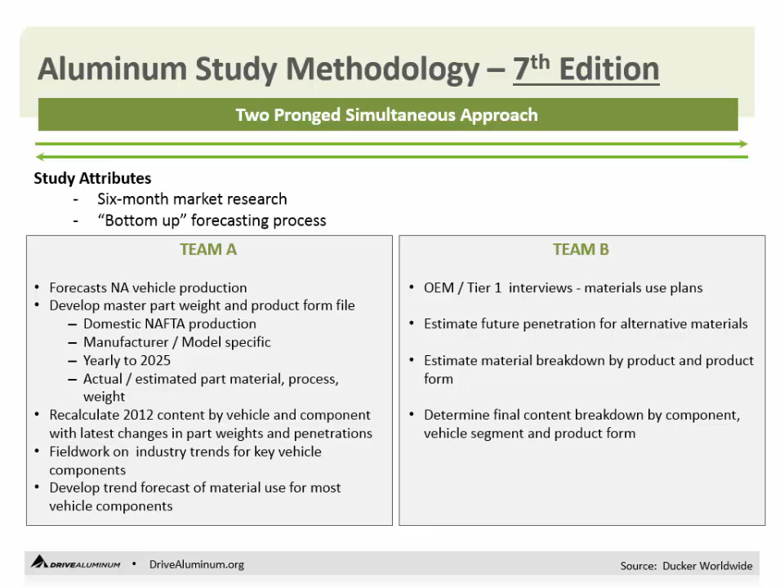If past research is any indication, the prior 6 studies' forecasts have been very, very accurate from our perspective. So this is kind of the macro overview of the trends in aluminum growth since 1975.

This is a report on average pounds per vehicle produced for vehicles in North America. All of this work focuses on vehicles built and produced in North America, so imported vehicles are not included in this data set. But the majority of North American, U.S., Canadian, and Mexican production are in this study.

The early days of aluminum, back in the 70s, heat exchangers were predominantly the growth area. We've grown from about 75 pounds per vehicle in 1975. In 2012, it was 350 pounds per vehicle, and the forecast is looking at somewhere in the order of 547 pounds of aluminum per average vehicle by 2025.

The growth in the 90s and through 2010 saw very significant growth in cast products, particularly engine components, cylinder heads and blocks, and also wheels. Today, cylinder heads are about 98% aluminum - most of them are aluminum. Engine blocks are at about 85%, wheels are about 65%.

Those products are nearing saturation in terms of market potential - they're reaching the maximum the market will be interested in. Hoods started to emerge in the early 2000s, and hoods today are about 48% of the marketplace.

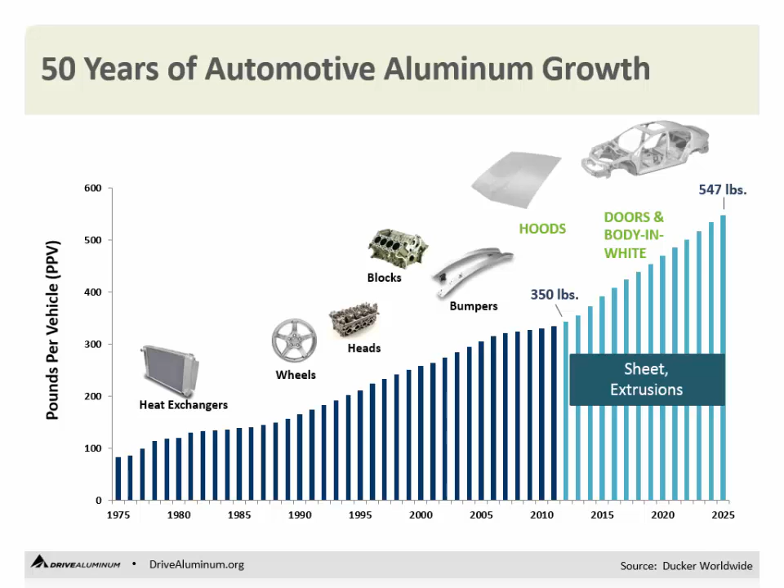That inflection point at about 2014 starts to grow at about 14 - it doubles to about 14 pounds per vehicle per year on average for the next 10 years. Most of that is in sheet and extruded product for body and closure panels. Basically, there's been 40 years of continuous growth, and we anticipate 10 years of even higher rate continuous growth.

We're not going to go through all the detail that you'll see in the report on our website, but picking off some highlights from the conclusions of the 2015 data set: the inflection point we talked about in aluminum content per body and sheet is driven largely by a single major program, the Ford F-150 pickup truck, which will be the first all-aluminum-bodied vehicle for high-volume production anywhere in the world.

We also have a vision going forward that pickup trucks will contain most of the aluminum growth in the marketplace, but will be followed closely by E-segment vehicles as well as SUVs and minivans. There's also continued growth in non-body applications, particularly castings and extrusions. We'll talk about that in some detail.

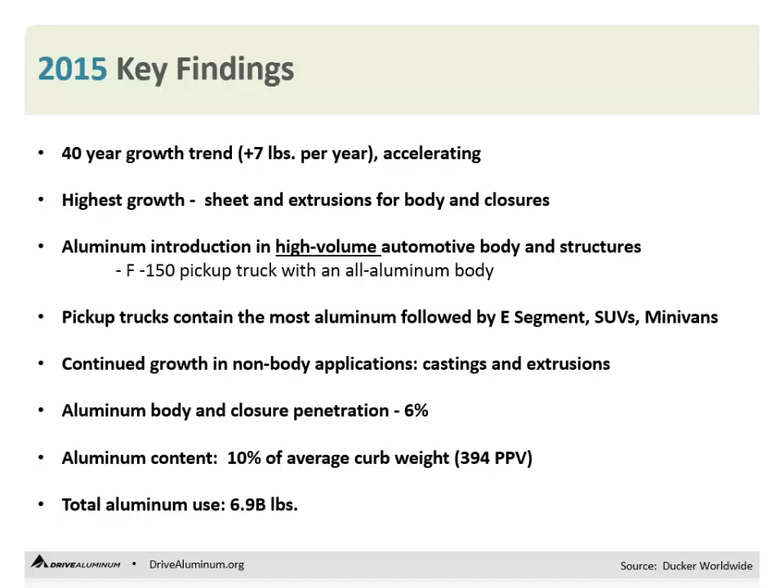Aluminum body and closure penetration by 2015 will be 6% of the market on a volume, piece-by-piece basis - that's up from less than 1% just a few years ago. Aluminum content in total will be about 10% of the average curb weight of a vehicle - very significant growth from just a few years ago. Overall, there'll be almost 7 billion pounds of aluminum products on cars built and assembled in North America.

Now, if we look at where the aluminum is used in a vehicle today, as a spot in 2015 on average, this chart is a distribution of the aluminum by major vehicle component or system. What we see is, if we look at engine components, blocks, heads, and other engine components, about 33% of all the aluminum used in the industry today is in engine components.

The next largest group is transmission and driveline components, followed by wheels, and body and closure is fourth. About 11% of all the aluminum used in 2015 vehicles will be for body enclosures, and that's driven by high hood penetrations in general and the F-150 program.

Castings will be 73% in 2015, down from 82% just a few years ago, and typically running well over 80% for castings. That's not down because castings are down, it's down because sheet and extrusions are up. And the engines are down from roughly 50% to about 33%, again because of the penetration in body areas.

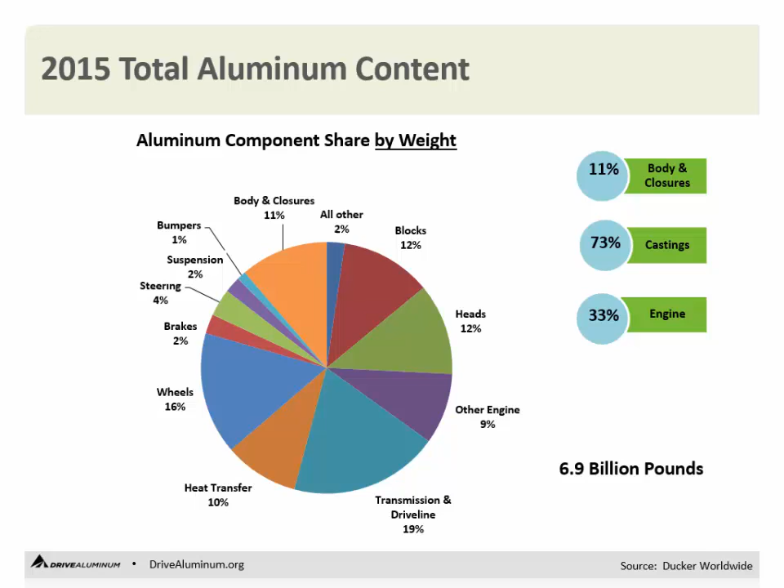When we look at where the aluminum is used, similar to conclusions we've been drawing for a few years, we look at the amount of aluminum used by vehicle segment. In 2015, the average vehicle content, aluminum content per vehicle, is 394 pounds.

What we see is A and B segment vehicles and C segment vehicles use less than the average content, and typically in these vehicles, the aluminum content resides in the engine, driveline, and wheels.

As we look up to larger segment vehicles, D segment, we find a little bit over the average, and in the D segment, we start to see hoods, lift gates, and trunks be converted to aluminum.

The largest segment of aluminum use is in E segment and pickup vehicles, again driven by the F-150 program. These vehicles tend to see hoods, doors, trunks, and in some cases full body in white, as with the pickup truck.

Full frame vehicles and E segment large vehicles are typically where the most aluminum is deployed, and we anticipate that will continue. This is a forecast of vehicle weight, average aluminum per vehicle between today, 2012, and 2025. We see very significant growth in aluminum content for full-size, full-frame trucks, also for E segment vehicles, with fairly continuous, steady growth between 2012 and 2025.

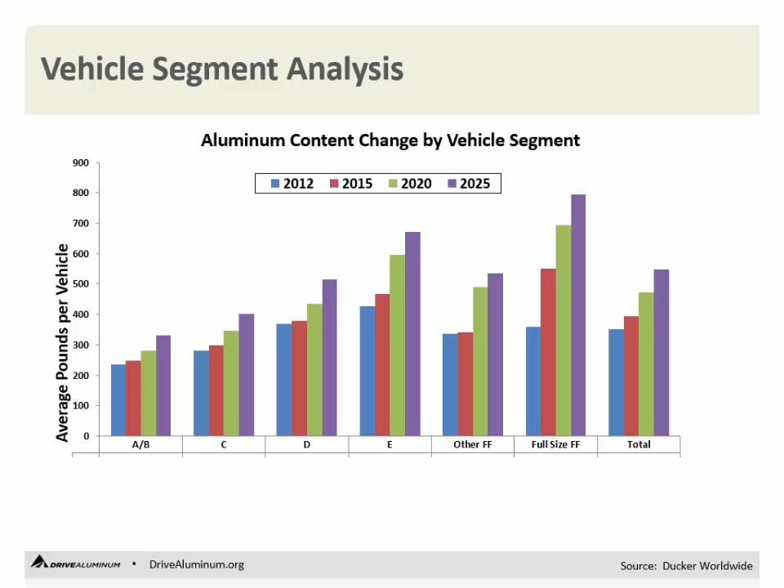Now we'll talk about more detail on the emerging growth in body sheet, particularly body sheet enclosures. Hoods by 2025 are expected to grow to about 85%. Complete body structures are expected to be about 18% of the market, and doors to about 46%. All three show very significant growth between now and 2025.

So what will this mean to the overall body structure mix of materials used in North America? Looking at bodies today, body and all closure panels combined, the average vehicle is 81% mild or high strength low alloy steel, 18% advanced steels, and 1% aluminum in any form. By 2015, aluminum will grow to a little over 6% of total body construction material. By 2025, it grows to about 26%. Steel still remains the majority material in the body, but aluminum claims a significant share going forward.

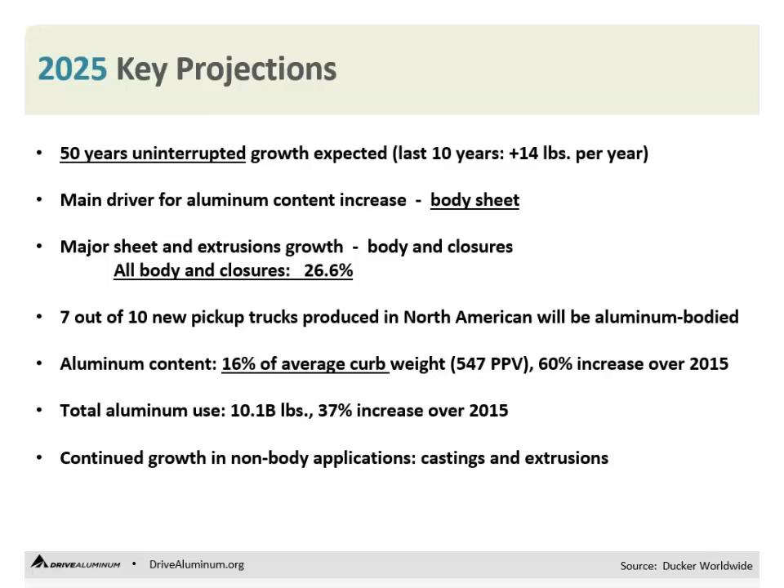That growth is fairly continuous, even going back to the 2012-2013 timeframe. It's a steady growth, which includes, in 2015, the large step from the F-150. But looking at the total trend over a long period of time, there's a very steady growth curve expected for body and closure volume in aluminum as a percent of the parts in the marketplace.

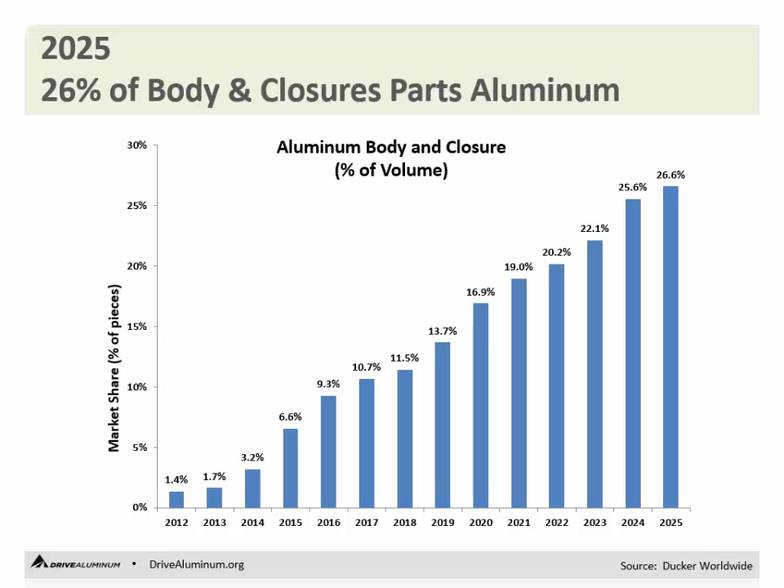If we look at it by individual componentry, we can see that hoods are the single largest growth area, going from 35% of the market today to about 85% of the market by 2025. The next largest area is doors, which are fairly low volume, low penetration today, and with the Ford truck will move up to about 6%, growing to almost half the market in doors by 2025. And overall, in complete body structures, this is the F-150 in 2015, growing to about 18% by 2025.

Now, the question always comes up: how much aluminum will be needed to support all this growth? This is the growth curve for aluminum sheet from 2012 out to 2025. In 2012, there was about 200 million pounds of aluminum sheet consumed in the marketplace. That grows to about 4 billion pounds by 2025, a fairly steady growth rate.

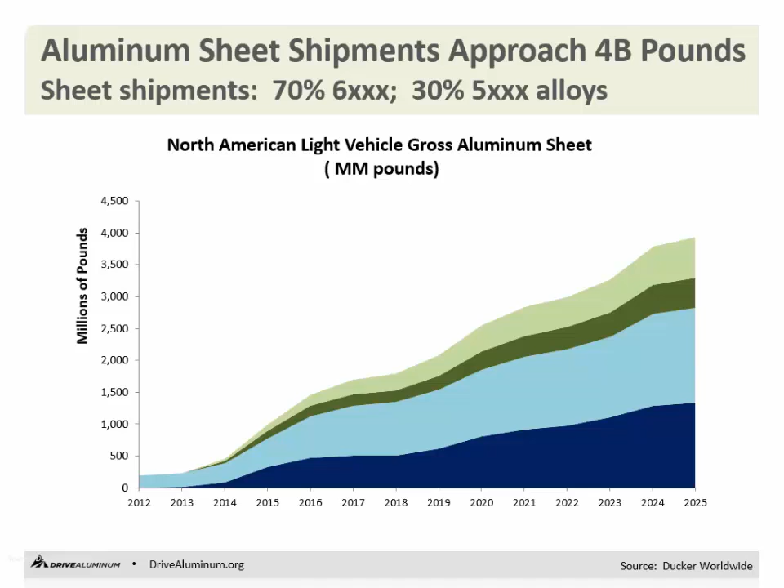The blue material is heat treat stock, 6061, 6000 series typically, and the green is non-heat treat material, typically 5000. So the combined total is about 4 billion pounds, almost 4 billion pounds of growth between now and 2025. And the sheet producers are prepared and able to support this growth with the necessary new investments to support this level of demand.

So we've said several times the major program in our industry is the Ford F-150, and I thought I'd take a minute just to recap what that program means to the aluminum growth in the North American market. This, to be clear, is in fact an all aluminum body and cargo box, and it will start production the fall of 2014. This is the first high volume all aluminum bodied vehicle ever in the world.

Now, this vehicle runs, estimates are about 750,000 vehicles a year. This is the largest program. There's over 1,000 pounds of aluminum on this truck, 680 pounds of that is in the body and structure. The rest is engine, powertrain, driveline, and wheels.

When it reaches production, this vehicle will be 25% aluminum, 25% of the curb weight will be aluminum. Overall program, aluminum body, as well as all of the other engineering work as part of the systems engineering, this vehicle will be approximately 700 pounds lighter than its predecessor and the same size with equal or superior safety performance. We've heard reports of significant improvements in handling, braking performance, and the fuel economy improvement has not been reported yet, but we're anticipating a very significant fuel economy boost for this vehicle.

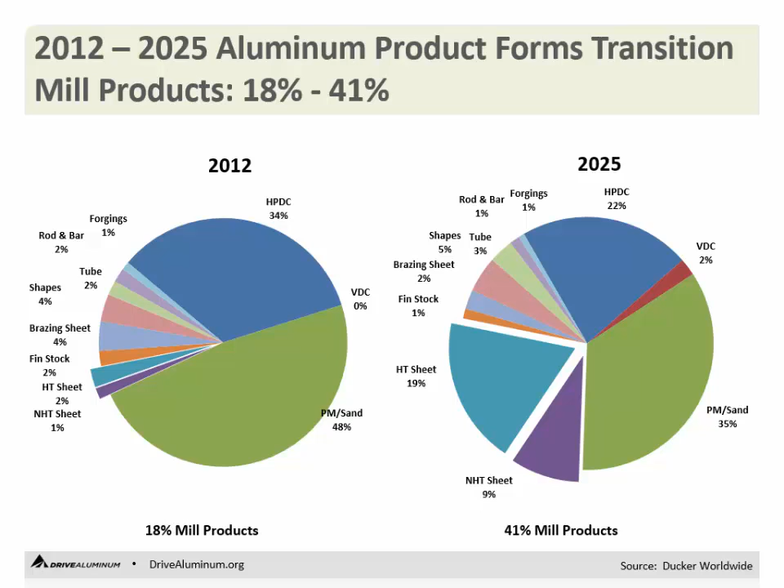That'll be the end of our comments on sheet, and just so we don't lose track of the fact that the casting and extrusion businesses in aluminum are alive and well, and also part of the support necessary to meet industry growth between now and 2025 and beyond.

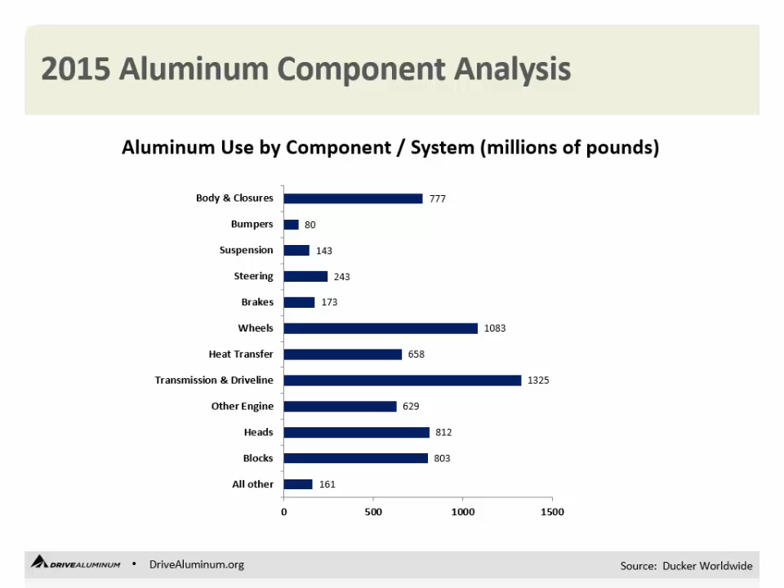Again, this is where the aluminum is used in a vehicle. We're looking at the bottom four items, all engine - that's the largest single area. This is 2015, sort of a recap of where the aluminum goes. Driveline is number 2, wheels is number 3, body is number 4. If we look at where those systems are going between now and 2025, what we see is virtually all of the segments are stable or growing with the market, with the increased sales of vehicles. The significant engine parts stay pretty flat.

Some decline in engines is due to downsizing, made possible by higher engine technology allowing smaller engines and lighter vehicles. The number of pieces remains the same, but engine blocks may go from 8 to 6, and 6 to 4 cylinders, so there's somewhat of a decline there.

What we see is driveline fairly flat, with some growth in transmissions due to the larger number of gears. Most everything else is fairly flat, with some growth in wheels and significant growth in steering knuckles. But the overall major growth is again in the body area.

Looking at castings specifically will tell us where the growth is coming from. We see some growth in sand, mostly permanent mold, largely in suspension components, knuckles, and ride and handling pieces. It's fairly flat in high pressure die casting, significant volume there, and we start to see the emergence of vacuum die castings, which are very important going forward for aluminum or steel body structures, mostly in suspension towers for future vehicle structures. Significant actual growth in that segment of the market.

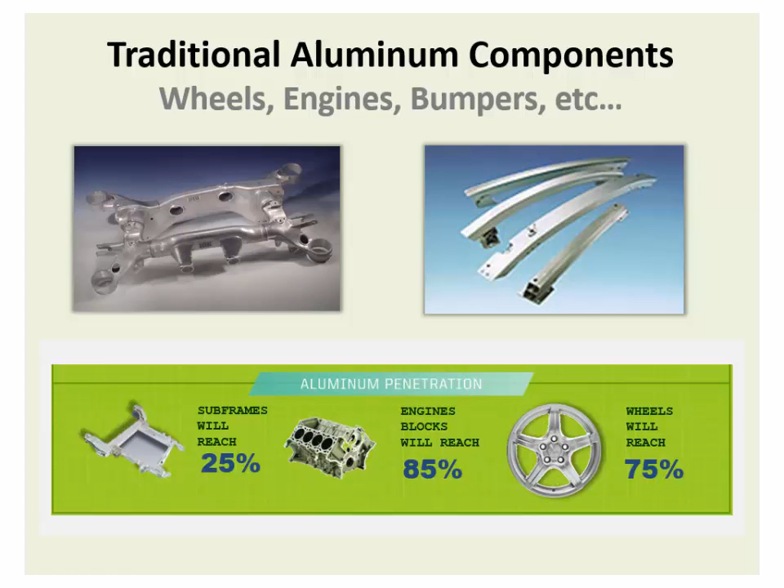In the extruded products area, we see very significant growth in both shapes and tube, the majority for body structures. We're seeing fairly high content of aluminum extrusions in support structures and energy management systems in future vehicles, particularly all-aluminum vehicles. In terms of body extrusions, gross body shapes and tube, again very steady growth between now and 2025, driven by the adaptation of aluminum to body structures going forward.

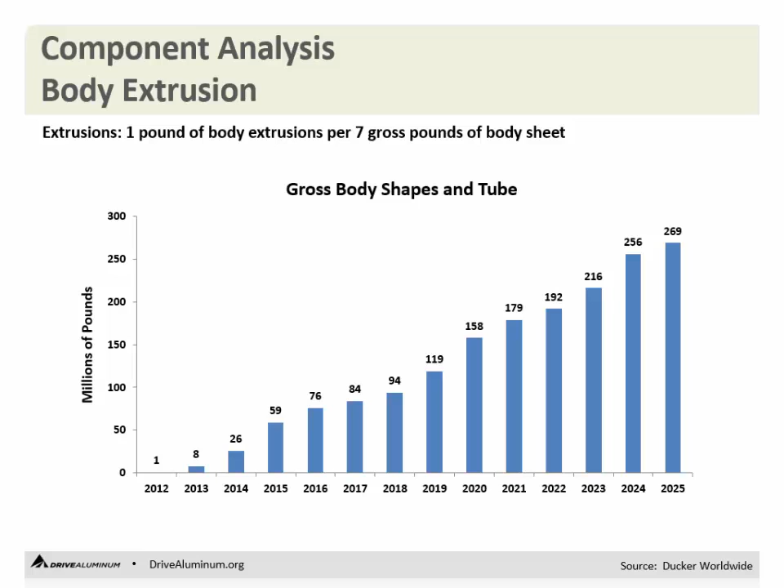So in summary, and we'll handle questions later, it seems very clear that the multi-material approach to future vehicle design is solidly present in the marketplace going forward. The complex demands on current and future automobiles require OEMs and everyone in the industry to take an aggressive look at deployment of the right material in the right place, and open up the arena to a variety of competing materials.

We see smaller, potentially lighter vehicles with predominantly steel, with some aluminum closures and other elements in the body. The mid-range vehicles see a mix of steel and aluminum in body-in-white versus closures. And large vehicles see a shift to very significant aluminum content in body and closure panels. Very significant shift.

Automakers will continue to increase the use of aluminum, up to about 16% by 2025. Very significant growth, and the growth rate at 14 pounds a year is actually the largest sustained growth rate the aluminum industry has dealt with in the auto industry. We've had 14-pound-a-year growth rates in the past, but not for 10 years in a row, so we're forecasting the longest period of sustained growth in our history.

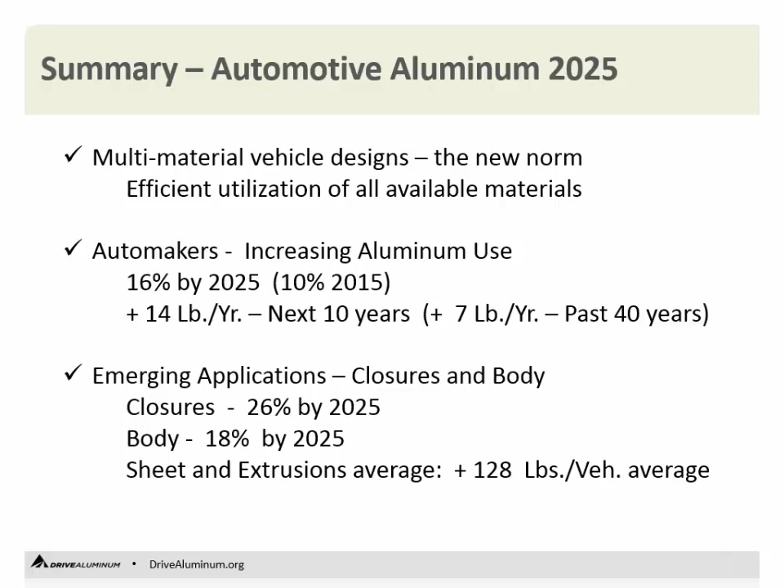This next slide is what's next, what this survey of automakers conducted by Ducker tells us is coming down the road. Here are some conclusions from the ATG and the Aluminum Association: automobile manufacturers are continuing to strive to build a better vehicle every year, and aluminum is helping to build that better car. Its value proposition to the automobile manufacturers is a fast-growing phenomenon. Due to its performance, efficiency, sustainability, safety, and durability advantages, auto aluminum is at an all-time high, and this survey confirms its use is expected to increase rather dramatically, exponentially, by 2025.

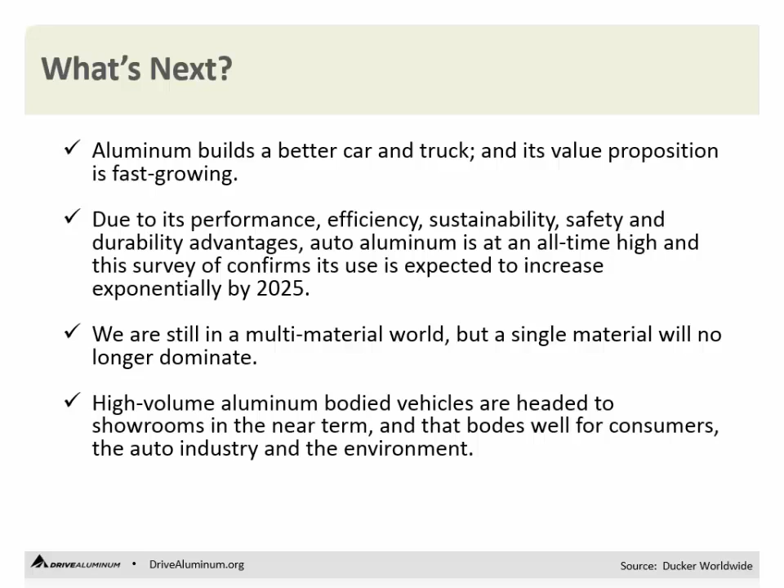Let me be clear, though: we are absolutely steadfast that this is a multi-material world, that there is no future of a single material that will dominate the entire industry as it has in the past. I think we're going to see a continuation of developments and progress at multiple levels, and aluminum will participate in that. High-volume aluminum-bodied vehicles are headed to showrooms in the near future, and that bodes well for consumers, the auto industry, and the environment.

In this last slide, which came from the Detroit Free Press on July 13th, I thought the headline or the first sentence was too rich to pass up because of some of the irony. Aluminum is closing in on the silver bullet status for the auto industry. Well, it's interesting, aluminum is now being called silver.

I'd rather call it the aluminum bullet. But that being said, the future to where we are today is 50 years of continuous innovation, continuous development, and collaborative work between a variety of different entities to allow aluminum to get to the point where we are today. And we're at an inflection point, only getting started on the next phase of solving many of the consumers' needs and requirements for years to come.

So I think that brings us to the end of our formal presentation. I'll turn it back over to our facilitator, who can help us with the Q&A discussion. We're also at this stage going to invite Dick Schultz, as Doug had introduced him earlier, to participate in any technical questions associated with the way the survey was conducted or its presentation of facts. So with that.

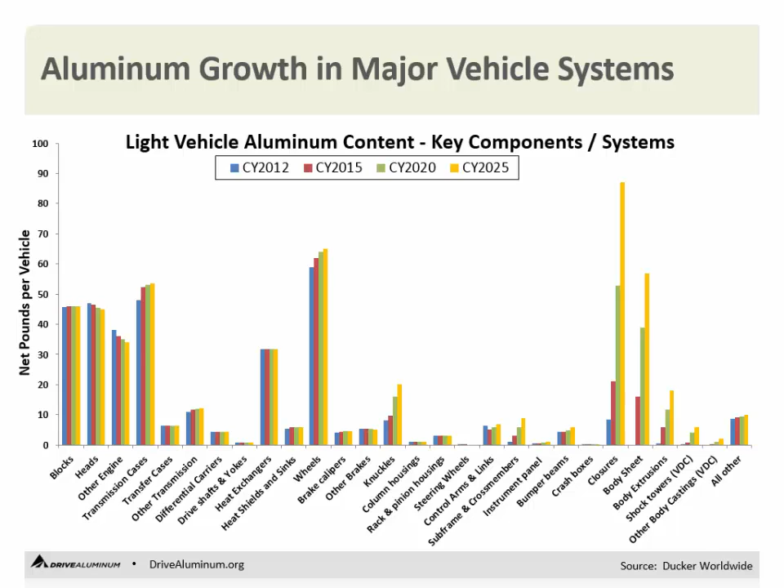So this just reinforces the fact that these are multi-material solutions. Steel parts are going to come and go. Even some aluminum parts are going to come and go as the engineers get better and better at using the multi-material solution, and you can't fight the tape. This is the way - these are the answers we got in our discussions with the OEMs, and that's what's portrayed on the chart. But it really isn't a big dramatic change in the later years. It looks like it, by the looks of the chart, but it kind of gets back to where it is now by 2025, maybe a little bit higher.

Our next question is, where exactly does the growth in permanent mold castings come from? Dick, do you want to handle that one as well? Yes, I think you alluded to it, Doug. One, of course, there is some continued wheel penetration.

And the second point is that there is quite a bit of steering knuckle growth. There is some - talk about multi-materials - there are some ductile iron solutions that are quite attractive. But overall, as we talk to the OEMs, they all have very large penetration plans for aluminum steering knuckles, particularly made by the VRC-PRC process, which is a form of permanent mold. So it's primarily the knuckles and some increased penetration of aluminum wheels, both of which require permanent mold rather than high-pressure die cast or sand cast solutions.

Our next question is, does this take into account any lost volume for current aluminum components that may shift to other materials such as carbon fiber?

In this case, we did - we really had a lot of discussions with carbon fiber, and in our study, the study that only goes to the association, I think we have about 20 pages in there of things we uncovered on carbon fiber. But between now and 2025, the cost curve for carbon fiber composites is just not going to decline enough for any kind of high volume use in North America and even in Europe. If we looked at 50 years or 30 years maybe even, I think we will see more penetration of carbon fiber, but not by 2025.